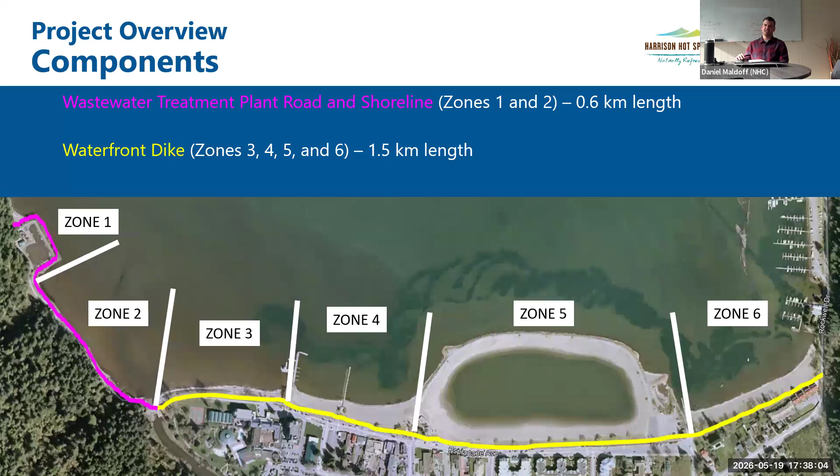Zone 1 is the wastewater treatment plant. Zone 2 is the access road to the treatment plant. Zone 3 is the dike in front of Hot Springs Resort. Zone 4 is the dike in front of the main commercial waterfront area. Zone 5 is the dike along the lagoon. And Zone 6 is the dike through Rendall Park.

So a review of what we discussed at the last meeting. We last met with you in December 2025 at a committee of the whole meeting. We discussed the design objectives and rationale for the dike improvements. Specifically, we talked about seepage conditions and the need for below grade seepage improvements.

And just to review, the concern with seepage is flow from Harrison Lake migrating through the dike fill, resulting in vulnerability to the dike. The analysis identified that in addition to the dike crest level not meeting current design standards, there is a need for seepage improvements as well below grade.

We then presented an updated approach to the dike improvements, which was developed based on community feedback. This approach includes no permanent raising of the dike crests along the waterfront. The permanent improvements would all be below grade to improve the performance of the existing dike. And if there were a large enough flood to exceed the crest level of the existing dike, there would be a flood response procedure with deployable flood barriers placed along the full length of the waterfront dike.

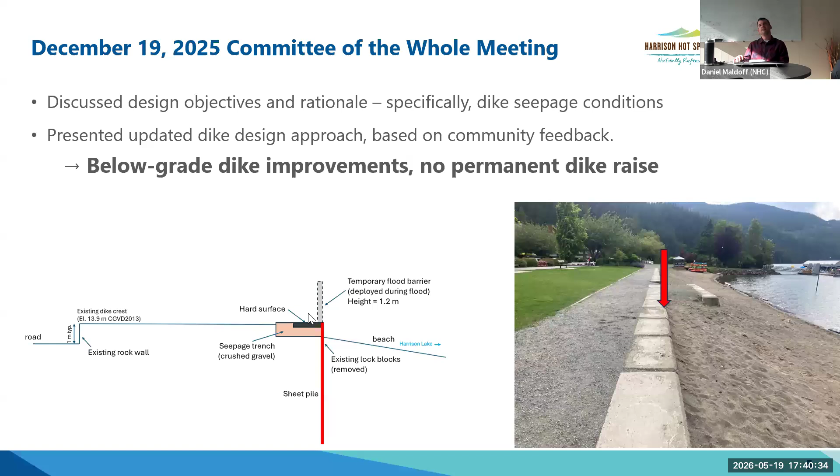And just to review again, we have a conceptual section for that dike upgrade, and the design includes a sheet pile, which would be driven at the location of the lock block wall that runs along the beach. That sheet pile driven into the ground would form a barrier against seepage moving through the dike fill. There would then be a hard surface at the top of that sheet pile, which would facilitate deployment of a temporary flood barrier during a very large flood.

So to review, the objectives for this project are to improve the resilience of the existing dike and shoreline infrastructure, to facilitate flood response, and to maintain existing viewscapes along the waterfront.

And the resulting approach for the wastewater treatment plant road and shoreline: the objective there is to improve resilience against erosion and to maintain access to the wastewater treatment plant during and after the design flood. So that involves raising the access road and the embankment around the wastewater treatment plant and improving the erosion protection along the shoreline slope.

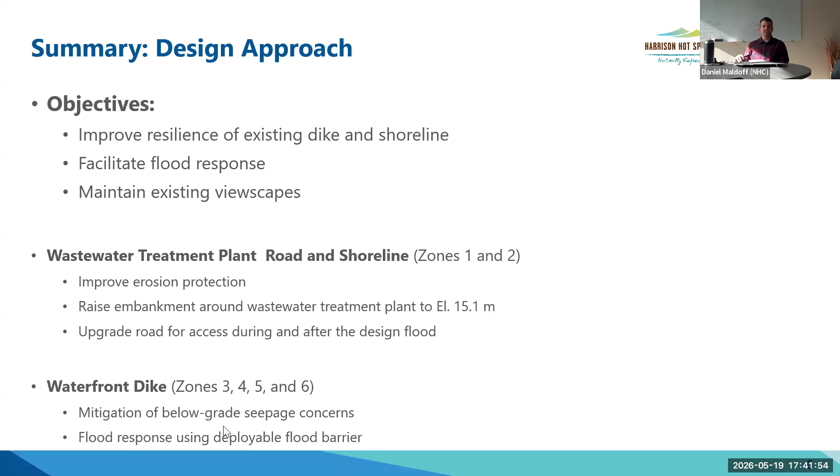And then for the waterfront dike, as we discussed, the objective is mitigation of below grade seepage concerns and facilitating flood response during a large flood.

So since that last meeting, just a review of what we've been up to. A key step was to confirm with the provincial inspector of dikes that the approach we were discussing was acceptable. We did meet with them earlier this year, and the discussions were positive, and we do have a path forward for this proposed approach. So that was a key step to have moved through.

Following that, we have refined the design and taken that concept we presented and implemented it in a design across the waterfront, and have been developing issued-for-permitting drawings showing a plan across the study area. Finally, we have been working on a review of environmental permitting requirements. Environmental permitting is a key consideration for this project. Any works that are considered in-stream works can have fairly lengthy approval timelines, which I'll discuss later. So getting ahead of this is important, and identifying the needs there is a key component for this project.

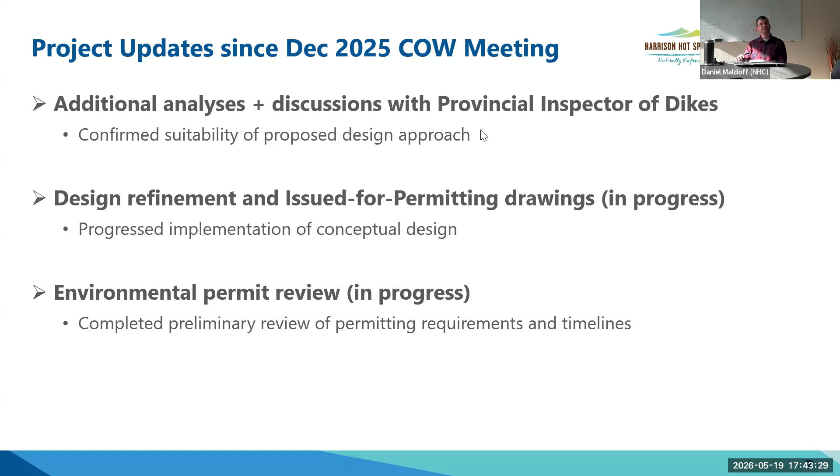So now I'll just walk through the implementation of the concept that we presented. This is showing zone 1, which is the embankment around the wastewater treatment plant. The approach here is similar to what currently exists, which is a sloped shoreline with riprap bank protection. For the upgrades, the embankment would be raised about a meter or so to an elevation of 15.1 meters to provide protection during the design flood, and it includes upgrades to the bank riprap to better withstand erosion.

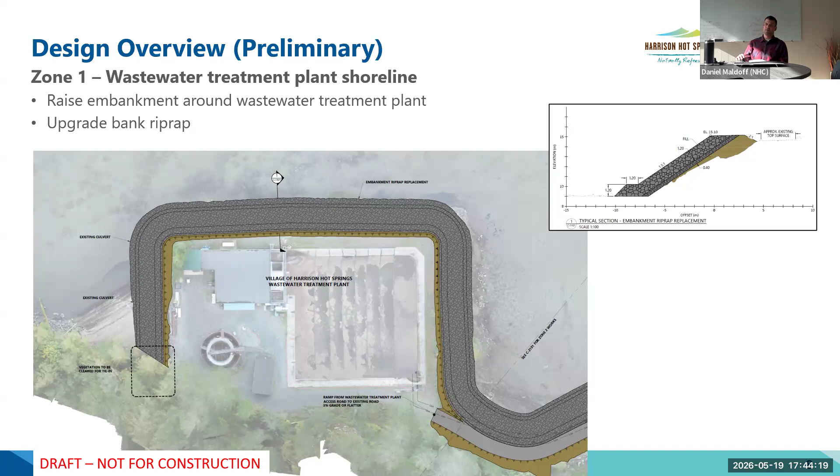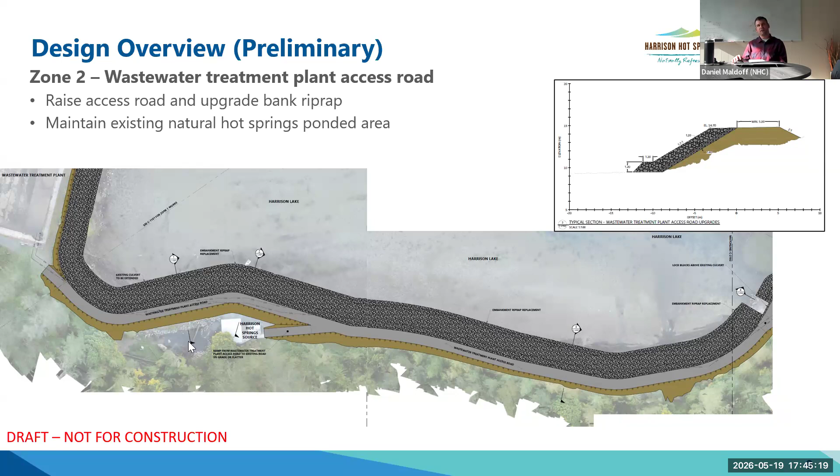Zone 2, which is the wastewater treatment plant access road: here we would be raising the existing access road to an elevation of 14.7 meters, going up 1 to 2 meters depending on the location. Currently the elevation varies along that road, and we would be raising it to a consistent elevation to provide access during the design flood. A key consideration here was to have the footprint not encroach on the existing natural hot springs pools by the hot springs source. So you can see in the plan view that the road is shifted out towards the lake to avoid having the toe of that embankment encroach on that pool area.

Moving along to the Miami River pump station, the concept here is similar to what was along the access road. It's a raised embankment with riprap shoreline protection, but an important challenge here is working around constraints with the existing conduits for the pump station and flood box, which convey flow from the Miami River to Harrison Lake, and just maintaining the existing footprint.

To work around the space for those outlets, in locations where the design interacts, the approach is to go up vertically with a lock block retaining wall rather than having a sloped embankment. That would be above the pump station outlet and likely along the flood box outlet as well.

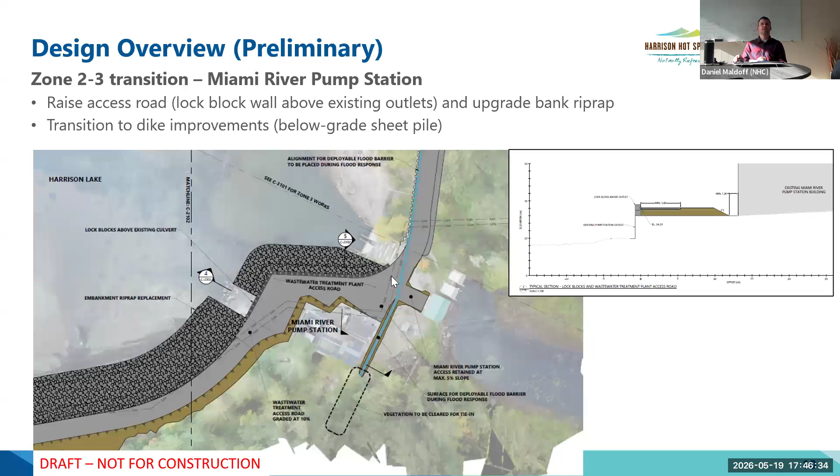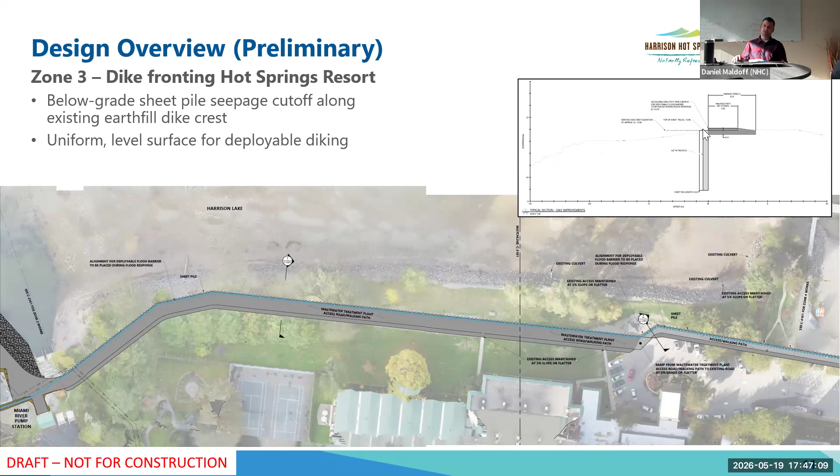Now Zone 3 along Hot Springs Resort, we move into the dike, and here the improvements are below grade as discussed previously. The main upgrade is the sheet pile driven into the existing earth-filled dike, installed at the waterside crest location of the existing dike, with some grading work to provide a surface for deployable flood protection during a large flood.

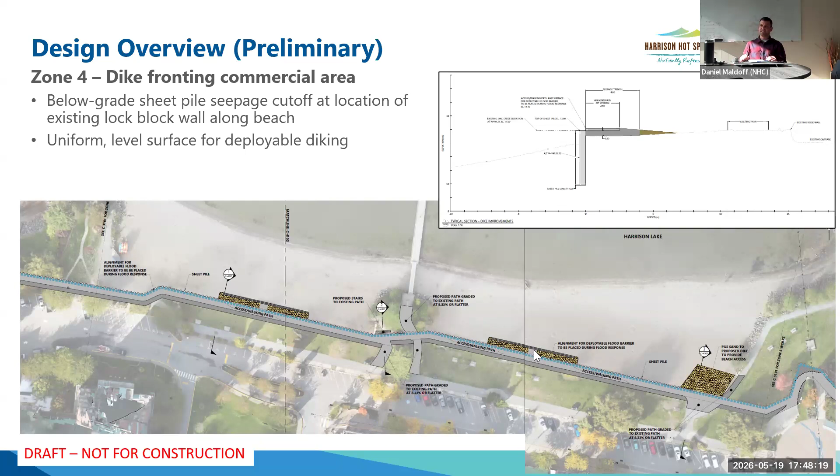Access to the beach, shown here in yellow, would be similar to what's currently there, with transverse ramps sloping down to the beach along the sheet pile, held in place with lock blocks closer to the beach. If you're familiar with the existing ramps down to the beach, the concept here is similar.

Then Zone 5 along the lagoon, the concept is very similar to what we showed in Zone 4, with the sheet pile installed at the location of lock blocks along the beach.

One key area to point out is the plaza along the left side of the screen that you see here. This is a tricky, constrained area, and the approach we have has the seepage cutoff sheet pile following the existing walking path around that plaza, and then transitioning to the alignment along the beach.

This is the eastern portion of Zone 5, which transitions from the lagoon, runs across the parking lot, across the boat launch access. The sheet pile seepage cutoff would be continuous through there.

Then it would transition to the earth-fill dike in Zone 6 along Rendall Park. Similar to the dike in front of Hot Springs Resort, the sheet pile would be installed along the waterside crest of the existing dike with some grading work done at the top, and then a tie-in across Rockwell Drive into the slope at the east end of the dike.

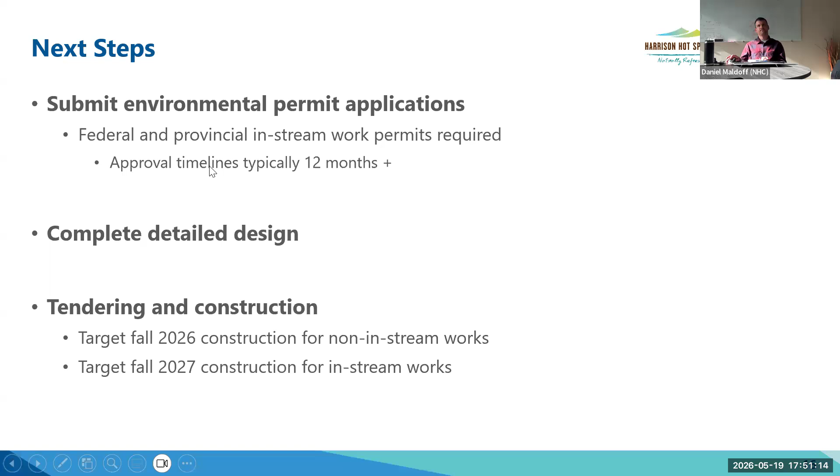So that is the update on the design. Thank you again for the opportunity to present this evening, and I look forward to the discussion.

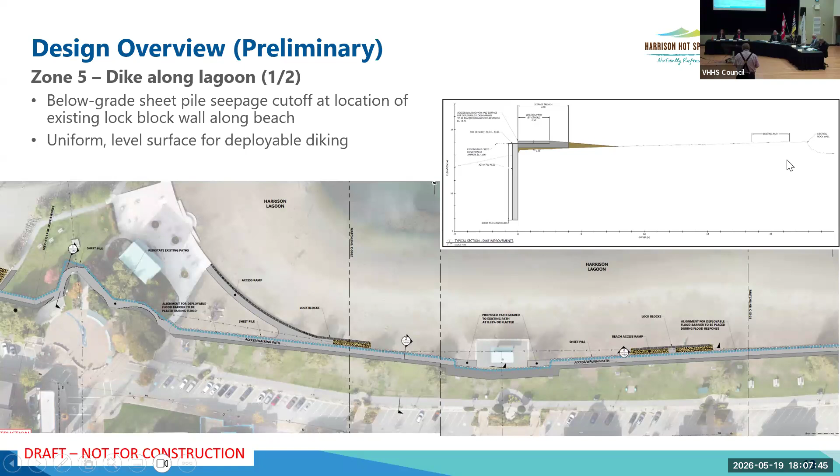Or are you going to have temporary barriers? Are you going to close the road? We'll get you an answer, because I had the very same question when I read through the presentation over the weekend. Mr. Maldoff, can you explain the design at this stage for the dike project as it crosses Rockwell Drive? Yes.

As I said, we expect that there will be a small amount of grading required to create a uniform surface along the top of the dike, although the intention is not to permanently raise the dike. There may be a need for a small amount of grading along Rockwell Drive to match that graded elevation of the dike through Rendall Park, although we're talking no more than 10 centimeters or so.

So if that is the case, there may be a gradual hump that needs to be added there just to create a smooth transition when deployable flood protection is placed. But we're not talking about a large hump going over the road, potentially just a small amount of grading, and the implementation of that is something we would need to work through during the detailed design process.

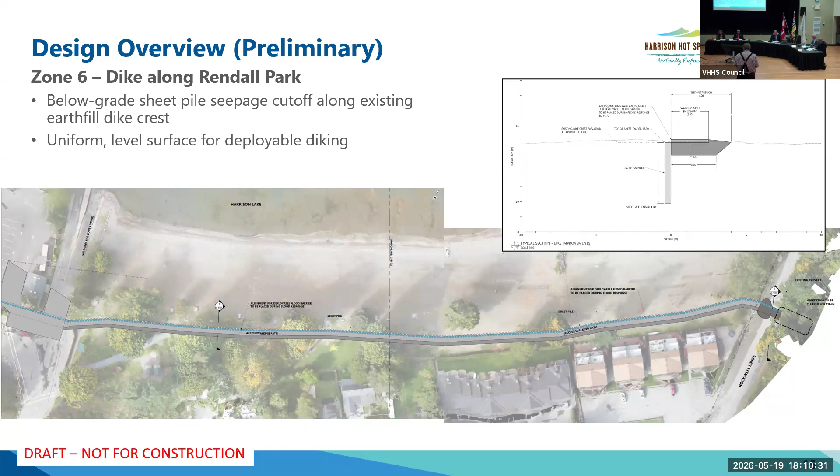Mr. Maldoff, can you explain how the project will proceed through the boat launch ramp, I guess, for lack of a better word? Yes, so similar to Rockwell Drive, there may need to be a small amount of grading work done just to create a smooth transition with the finished grade of the prepared dike, but we are not proposing to do any large raising there, and the sheet pile would form a continuous barrier across the boat launch as well, below grade within the paving that's there.

Thank you, Mr. Maldoff.

With the province cancelling hospitals, cancelling schools, and cancelling everything, what makes you think they have the money available to fund this project? And are we, the taxpayers, paying for all of the design work up to this point, or is that also covered by a grant, and is a grant secured? My concern is that we're looking at a multi-million-dollar project here that I don't believe is ever going to get built.

If I understand your question, is there grant funding available for this project to proceed? I don't believe that's part of this presentation, but it's an important question. Can I turn to CAO Cook? Is there grant funding for this?

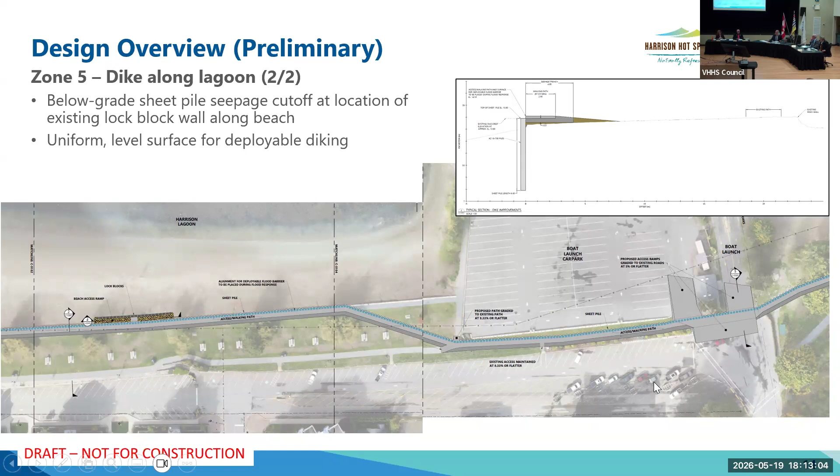Then we'll conclude this part of the agenda and move on to, I understand there's two recommendations. Who do I look to proceed with this? CAO Cook? Mayor Tallon, would you like the recommendations read out? Sure, yes, thank you.

So the first recommendation is that council directs staff and Northwest Hydraulic Consultants to submit all necessary environmental permit applications required for the waterfront dike upgrade project and complete detailed design with the intent to tender the project. The second one is that council directs staff to issue a request for proposals for construction to take place outside of peak tourism season.

Moves, Your Worship. Recommendations moved by Councillor Faccio, seconded. I saw Councillor Swinban's hands first. Discussion on the motion regarding these recommendations. I'm sure everyone's got something to say. Councillor Swinban, do you want to start us off?

Sure, thank you. It's appropriate, I assume, to ask questions. Daniel, you still there? Absolutely. Thank you, how are you? I'm doing well. I remember having this conversation with you probably 3.5, 4 years ago, and it's one of the reasons I got into politics. I just can't believe how far we've come from what was originally proposed back then to what we're looking at now. Kudos to you, and kudos especially to our staff for your persistence and patience in this matter with council, pushing it back so many times to come up with a different design. So thank you.

Question though, for along most of the length is going to be some sheet piling, and we are impacted by wind erosion here. So I'm wondering, is there a possibility that this sheet piling will become exposed and therefore have a step down into the lakeside sand where people might get hurt or have to step down, or will it be completely buried and overtopped with your walking path?